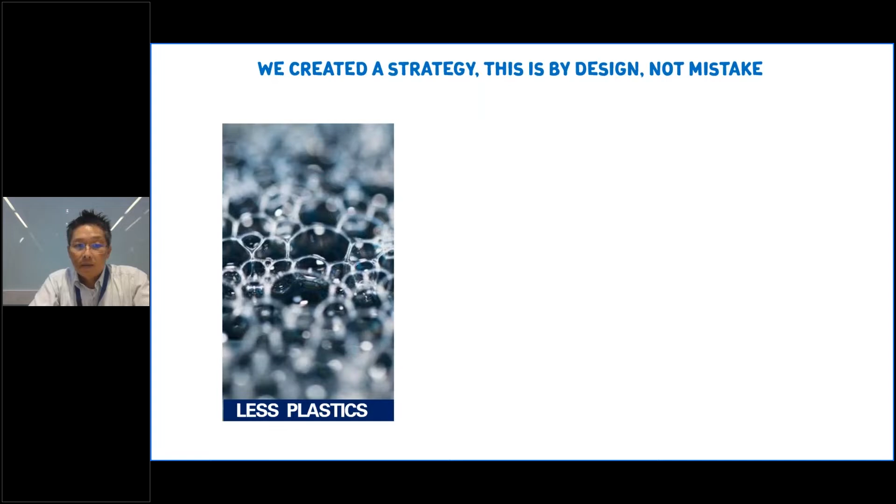And therefore, we create the strategies by design. So we're looking into how we use less plastic, how we make plastic better, we call it better plastic, and wherever we can reduce plastic in use. So that is really simple, how we tackle plastic as a problem, right?

So there's an example where we already use recycled plastics. In the US, and also in Southeast Asia, we have a lot of bottles using recycled plastic. We are the lead in using that. And at the same time, we also need to turn packaging which is non-recyclable into recyclable. So across categories like personal care, beauty, home care, food and refreshment, in sachets we are looking into mono material.

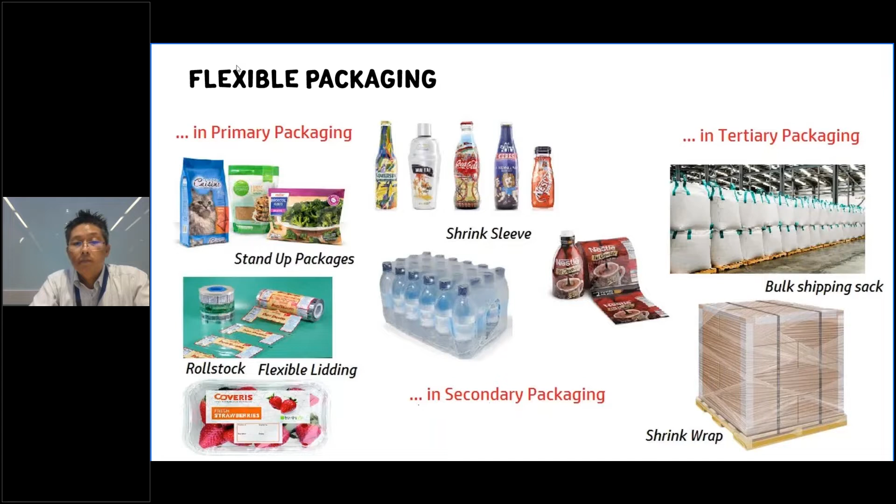Flexible packaging is the key challenge for us and for everyone here as well, right? Because it represents every type of packaging, from primary to the decoration of the pack to secondary and tertiary packs as well. Everything is flexible. Why? It's so good. It's so light. It's so cheap as well. But of course, at the same time, it brings a lot of benefits to us as well as challenges.

So I would like to take this as the starting point where we tackle the plastic problem, right? Flexible packaging is absolutely very lightweight compared to any other packaging format, right? Obviously, it protects the product as multi-layer, you see. So we enjoy that. It carries the right quality to the consumer, on shelf it's also brilliant with a lot of differentiation, and when you carry it home it's also light.

However, the bigger challenge for flexible packaging, after all that benefit, only comes after consumer use. I call it post-consumer, right? Where does it go? It goes to incineration, rivers, the ocean that we were just talking about at the start, and landfill, right? Why? Value. It has no value remaining. With those multi-layer packaging, there's no value. How do we turn that around to get it more recycled, and then bring the value back?

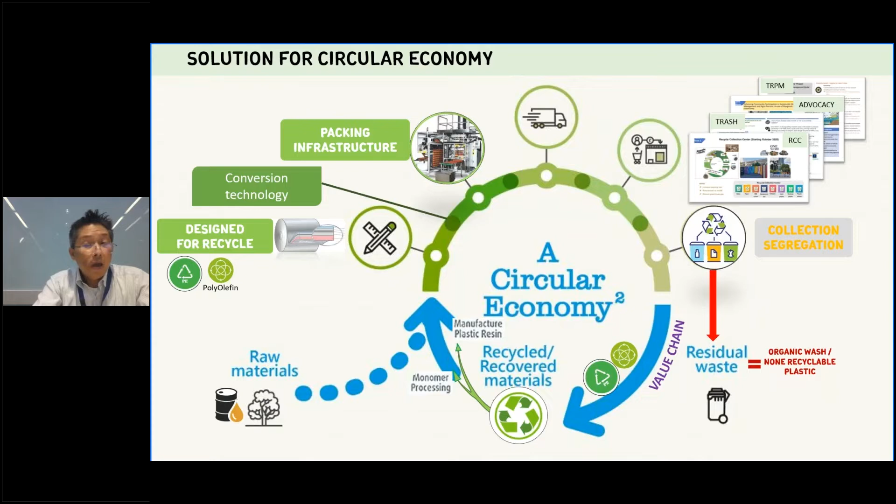So at Unilever, we also put in a lot of activity, along with collaboration, especially in Thailand, in several programs we call, as you see, TRASH, advocacy, and EPR. There are a lot of things we are doing in every market that we have. So we're not alone. We have to work together, guys. It's not easy. This is a tough job to be done, right? But I believe we can make good progress if we are all together.

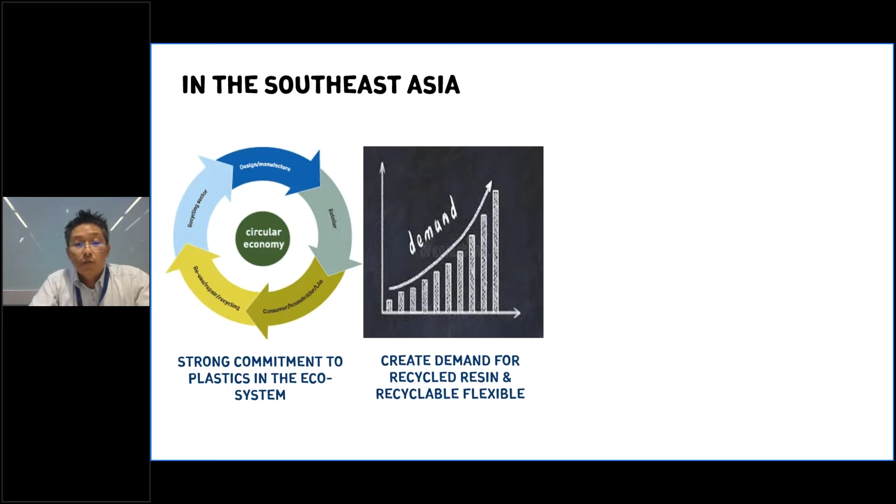We will add demand for using recycled resin. Then we can talk about recyclable plastic. If we make recyclable packaging and there is no demand for using it, what does it mean, right? So we are the ones using it as well, and of course also turning flexible packaging recyclable so we can create the demand, right? And at the same time, we also create a lot of

forums for collaboration. For example, here in Vietnam, the chairman sits in the forum and talks about our mission, our job to be done, what we are looking for. At the same time in Thailand, ITM does similarly with the Thai community for the Thai market.

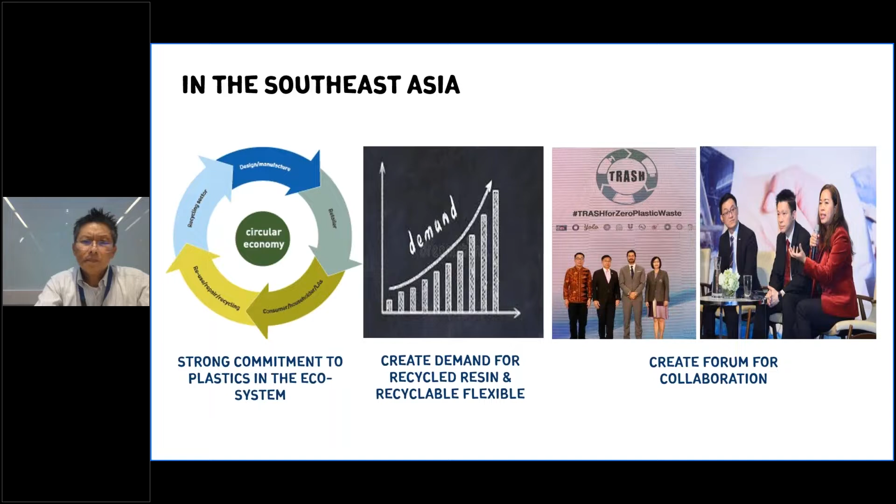This is an opportunity for all of us to level up our collaboration, boosting technologies developed for, first, design, second, converting using mono material, and third, technologies to handle this material, right? Mono material is very different from multi-layer flexible. PET has very high heat resistance. Mono materials like PP or PE are very low. So that's always different. Infrastructure needs to be upgraded anyhow, right?

And in the end, how we push together, work together to build segregation, and make recyclates better, right? Better value. If it's better value, then it's going to be recycled, right? And how we deal with legislation in order to unlock it together, with activities on collection and segregation.

Okay. Lastly, I would like to share with you a project where we turned the sachet, which is multi-layer packaging, into a mono material. This was launched in Hanoi, Vietnam, last November. That's actually the first ever that we brought something like this, talking about sustainability.

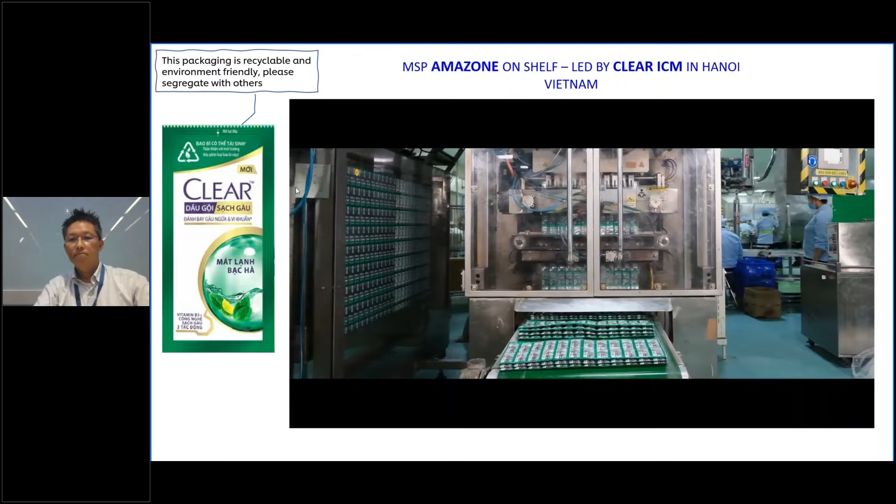All you need to do? Segregate your used sachets. It will be collected and recycled into usable packaging. Clear believe men and women deserve to have a clear, dandruff-free scalp without damaging the planet. What are you waiting for? Clear head and clear planet.

And that's all. I bring the context into here, as what you were doing. I'm looking forward to a wider, bigger collaboration among the industry and among those leading on technology. This is how we can do this together. We believe we can solve the problem together. Thank you.

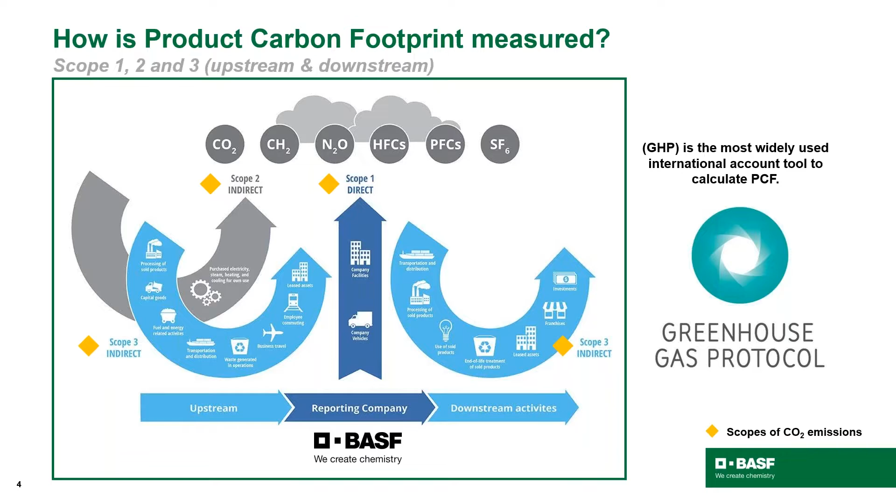So in this case, as a coating and adhesive supplier, we make use of this carbon footprint measurement to tell our customer what will be the carbon dioxide emission in the process, where we cover cradle to gate. So where we bought this material and put it into our process, after calculating the greenhouse gas emission, we have a value, CO2e, the carbon dioxide emission in this whole process, from the raw material until it is shipped out from the BASF gate.

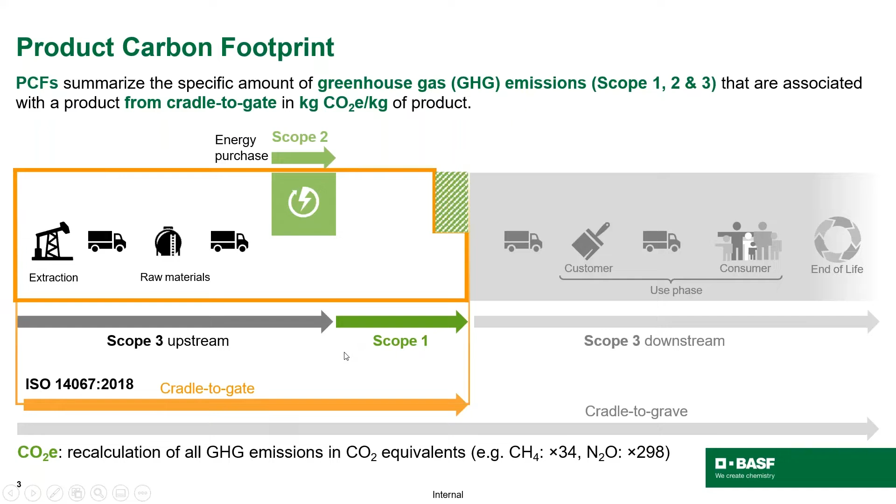So we have 45,000 products already with product carbon footprint data, comprising 20,000 raw materials under scope 3, 10 terawatt hours per year of energy that we purchase, which is under scope 2, and scope 1, where we include the 700 production plants in the calculation. So we have a tool that does the calculation to come out with a carbon dioxide emission per kg of dispersion that the customer uses. So this is how we do the calculation within BASF.

So how does it look? When the customer wants to know the emission, this is one example. You have a product which shows 1.3 kg of carbon dioxide emission per kg. So if you use 1 metric ton, you just multiply by 1,000, and it becomes the kg of carbon dioxide emitted for the volume you use, either annually, monthly or weekly. So it is very easy for the converter to calculate the carbon footprint of your product if you are using a BASF product.

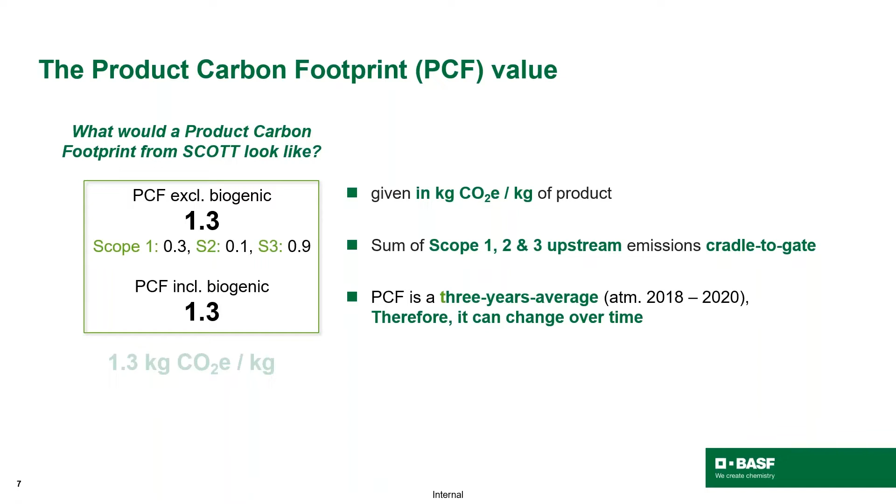If you take 2020 to 2023, this number will be different because it includes the biogenic, meaning the bio-based raw material that we use. Without the usage of bio-based material, there is a baseline number. After using the bio-base, either partially or completely, this number will change because it takes 3 years of average. If you see these two figures the same, it's because the average of 2018 to 2020 is still low, meaning the usage of bio-based material in the process was still considerably low. So in the long run, this figure, the PCF including the biogenic, will get lower and lower. This will be the value we show our customer, how much is the carbon footprint if you are using BASF product.

This is just an example to elaborate what is the benefit of using our material, which involves using the bio-based material. We call it the biomass balance concept. That means we use material from bio-based sources, either from bio-waste, biogas, or biomethane. This kind of raw material that we put into our process allows us to calculate how much percent of bio-based material is used to produce a product.

So this is a comparison, for example, the acrylic dispersion, just as an example. This product is Acronal 7660. Before, it had 2.5 carbon dioxide emission per kg of material. Using the process, we reduce the energy, we use cleaner energy. The most we can achieve is 1, but this eco version is 1.3, for example, as carbon dioxide emission per kg. But if we use the bio-based material in the biomass balance concept process, then it will reduce to 0.4 CO2 emission per kg of product. This shows a 70% reduction. This comparison is between the fossil-based material versus the bio-based material.

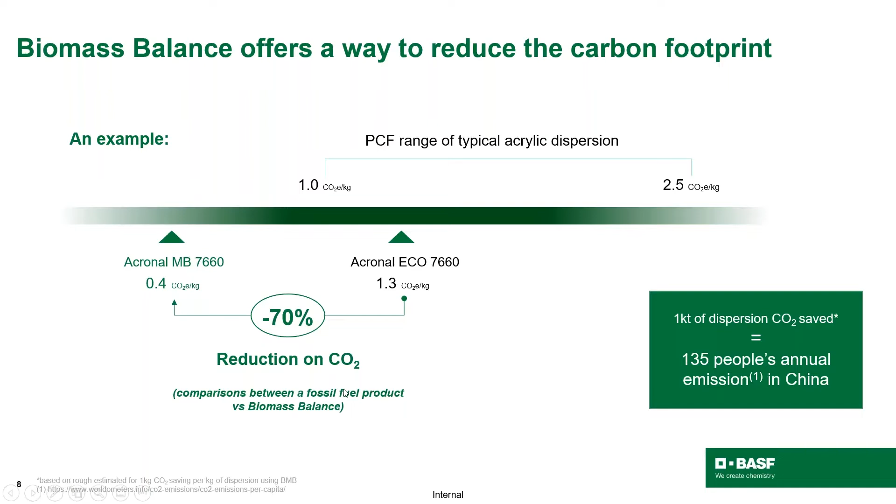So this is the value and the benefit of using bio-based material, and we can help our customer understand the carbon footprint reduction comparing fossil fuel and biomass material.

What is the benefit? People may ask, if I use this material, what will be the benefit? Sometimes you need to know if there is a government initiative - some countries need the consumer or converter to show the carbon footprint of your product, so you need to comply with governmental regulation. Some organizations have sustainability targets - if a brand owner wants to set product carbon footprint reduction goals for years, this could be a very helpful tool to help our customer, converter, or brand owner understand if they buy product A versus product B, what the carbon footprint reduction will be. And there's regulatory and legal pressure.

Sometimes environmental bodies or non-government NGO bodies want to help society with regulation, to put pressure on the converter or the industry in order to produce lower carbon footprint material. So this is the value added, and this is the benefit where BASF can play a role. There's also investor demand from big organizations - you need to have ESG reporting in the investor, annual, or financial report. So this is also one area where product carbon footprint measurement or data can be helpful.

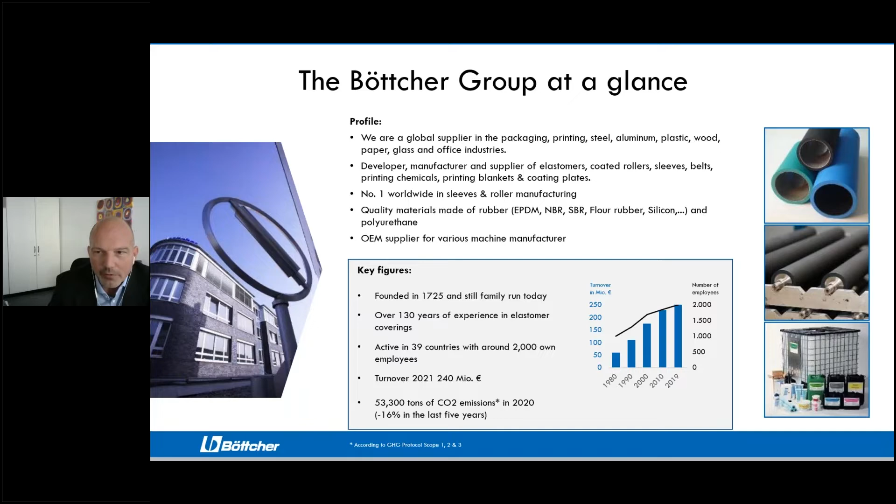We also consider the reduction of CO2 emission in our production. This will go step by step on all the different locations we have. So Böttcher is a group.

We have already 27 production plants in 39 countries, which enable us to be close to the customer for serving this. Our headquarters is located in Cologne, Germany, where I am currently also sitting in my office.

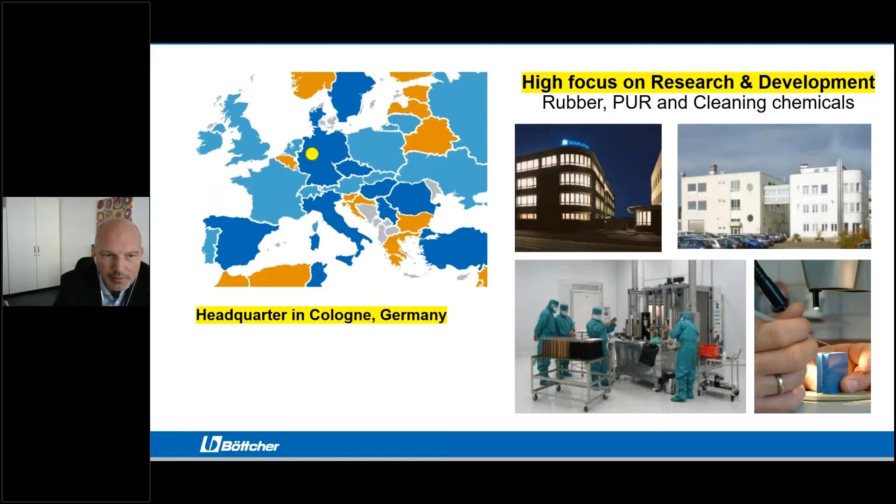Here we have our R&D, where we develop the compounds for the covering of the rollers and the sleeves, which we produce, for example, for company Comexi. We have our own rubber mixing plant, which is also essential to assure the high quality.

From this mixing plant, we deliver the coverings for the rollers and the sleeves to our production plants in the world, which means if you get a roller from Comexi, it will be the same compound as if you get a roller produced in Thailand or in America.

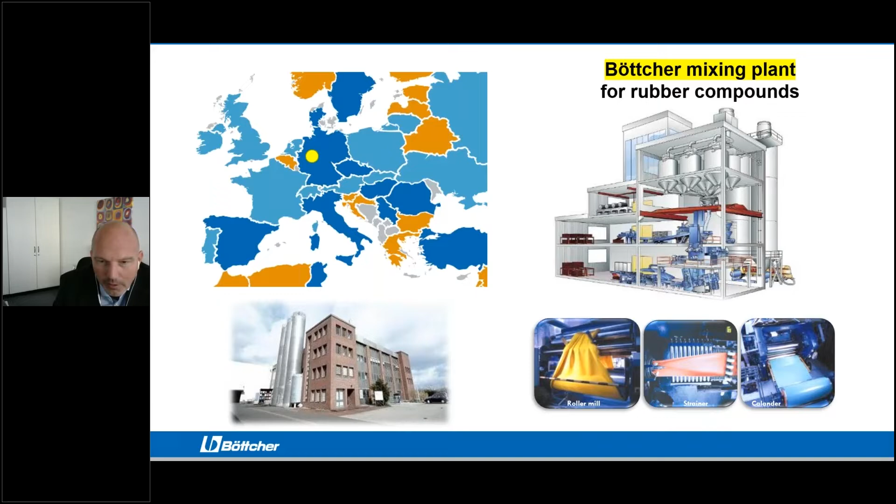Our relation to Comexi is mainly via our subsidiary Böttcher Ibérica, located in Madrid. So there is a close cooperation. We are proud to be able to deliver products not only for lamination, but also for the Comexi offset CI and also for the slittering device.

So that was a brief introduction about this, and now I would like to come to a bit more in practice. When I got the item for this presentation, I considered: what can be the contribution of an elastomeric sleeve or roller covering to make a sustainable production process?

So what is the target is clear, I guess. We have to consider the environment. We have to find ways to reduce the carbon emission. So I think the target is clear, and also thanks to the information from the previous speakers from BASF and Unilever, it's totally clear that something has to be done.

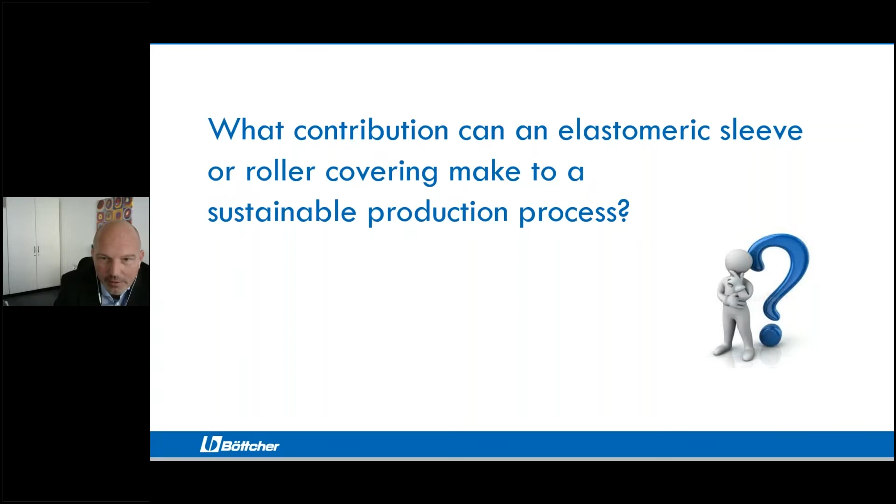But what can we do from our production process? What are the challenges if you run devices for flexo printing, rotogravure, or also for lamination or coating?

What we see is a change in the material side. So we see more and more thinner materials to reduce plastic amount, but these kind of materials should have the same barrier properties. We see also a new combination of material with a higher content of recycled materials.

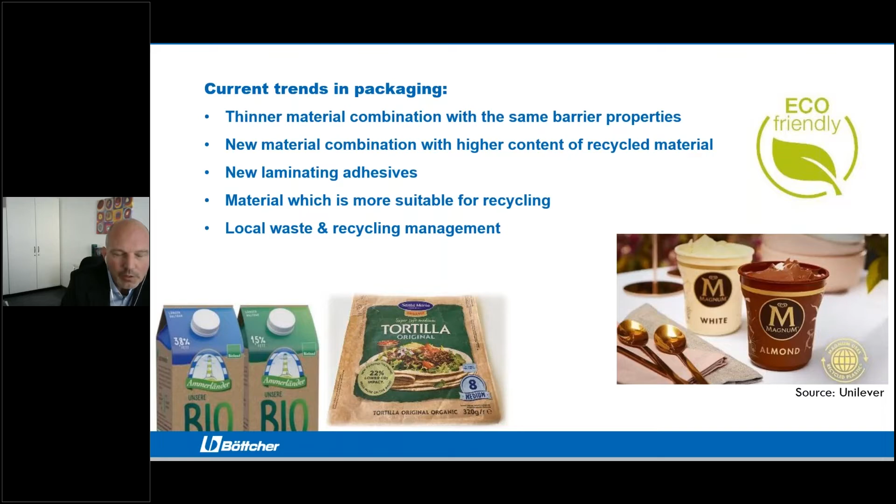We see also new lamination adhesives to make this processable. We see materials which are more sustainable or suitable for recycling. And also an important part is more local waste recycling management. So these are the trends which we notice from the different markets around the world.

So what are the challenges for our packaging industry, and how can I adapt my process to the new requirements, which means how can I produce this? And of course importantly, who can support me on this, which means how can the supplier support me to make it possible to produce new materials in my production.

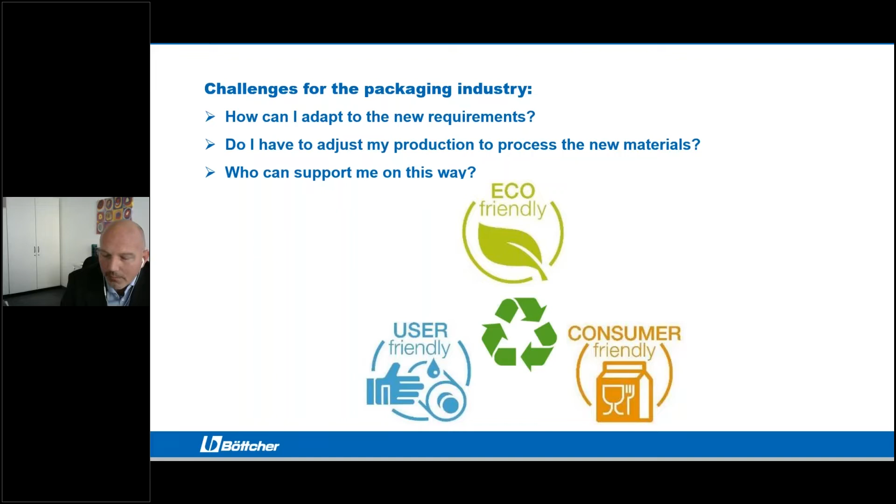From our side, elastomer technology can help to adjust the production process to the new materials. This will be our part. We should have high performance and long service life of the coverings. This means also reduction of waste in the production. And also, last but not least, we should take care of the logistics. This means we should have a short distance supply to you.

When it comes to lamination and coating in your production, then you have different options from Comexi, specialized for your individual requirements. And now I would like to take a short look into what we can do in case of coverings.

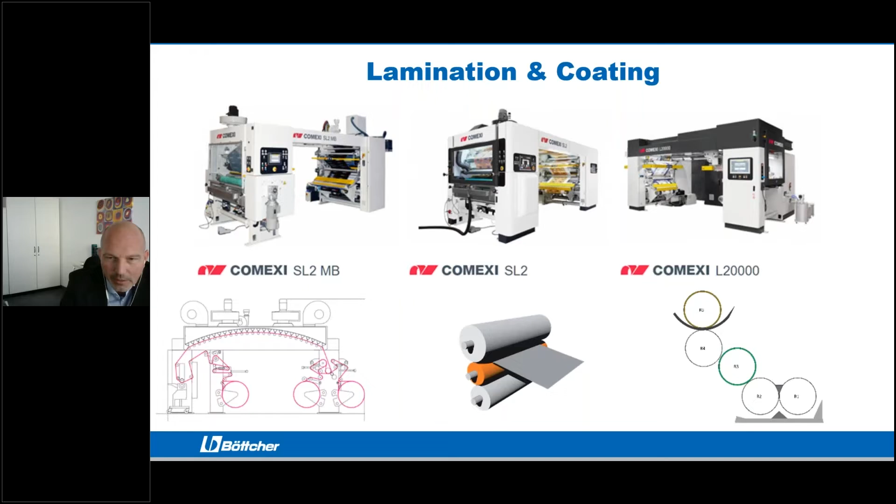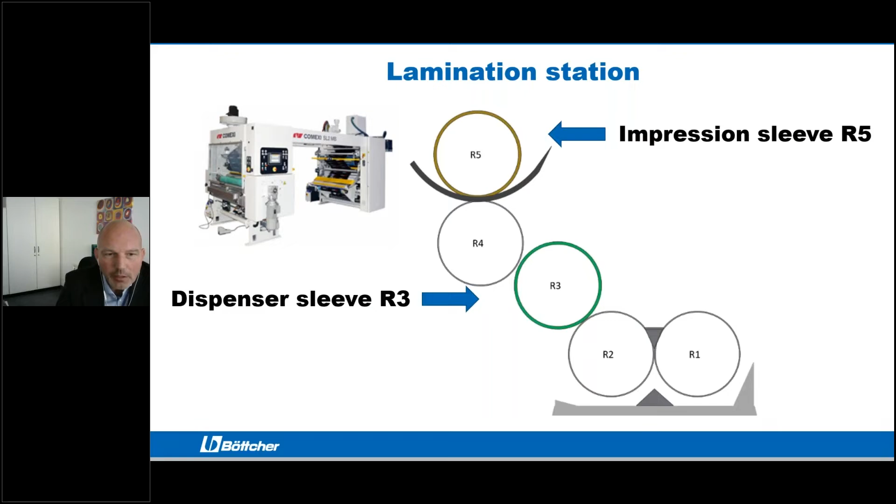If we look at a classical lamination station, we have two types of elastomer rollers or sleeves. One is the impression roller, and the other one is a dispenser sleeve in this production process. The covering of rollers and sleeves normally shows up with different requirements.

This can be, of course, optimized media transfer. We need some good mechanical and dynamical properties. Abrasion resistance and also chemical resistance is also very important to have a long lifetime of the products and of the sleeves or rollers you are using.

The basic structure of an elastomer material - for example, some of you may know we call it an EPDM with 60 Shore, but EPDM is not only one basic polymer. Normally the coverings are made out of a recipe, and this recipe contains up to 15 to 20 different ingredients.

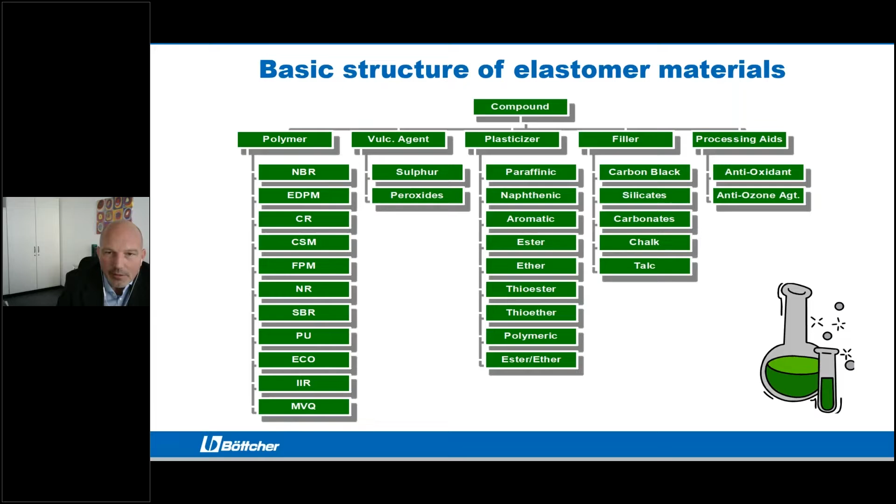This can be the polymer like EPDM or NBR, but there are also vulcanization agents like sulfur or peroxide. We need some plasticizers, we need some fillers, and also anti-aging processing materials inside. So this means the elastomer covering is made out of 15 to 20 different individual ingredients.

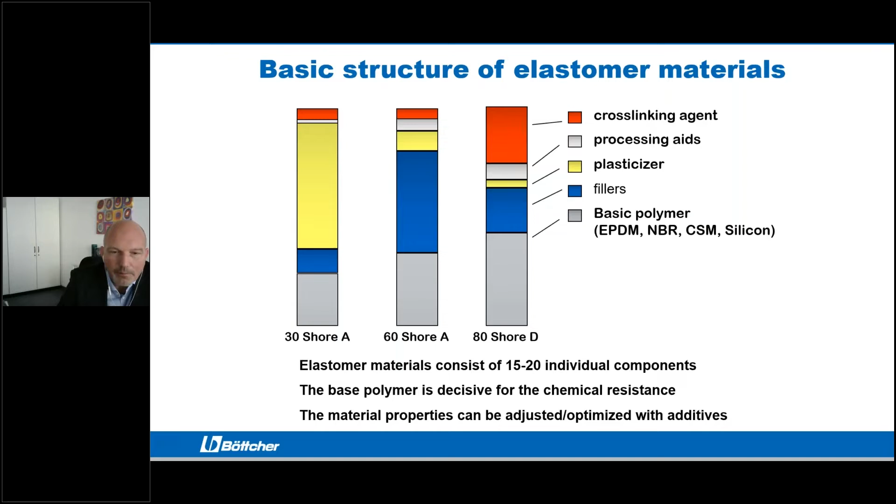The basic polymer, like EPDM or NBR, is mainly responsible for the chemical resistance. This means if we have swelling or shrinkage, or if it's stable, and we can also use additives to adjust the different properties. Here is a sample of different hardness, which can be, for example, 30 Shore A, quite soft, then 60 Shore A or 80 Shore D, which is a very hard material. Depending on the recipe, we have different properties of the material.

When it comes to chemical resistivity, we simply split into polar rubber and non-polar rubber, and also polar or non-polar liquids. If you have a polar rubber like NBR and a polar liquid like an ester, such as ethyl acetate, and put them together, you will get swelling. If you combine EPDM with a polar liquid like ethyl acetate, there is no swelling.

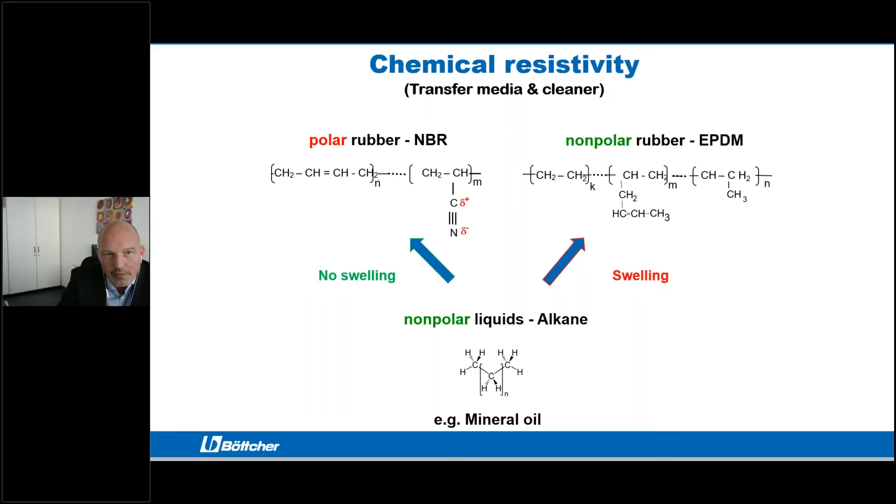Same in the opposite case: if you have a mineral oil-based product, used for example as an ink for offset, and you have a polar rubber, then there is no swelling. If you combine mineral oil with an EPDM, then you will see swelling. Swelling means an increase of volume and a decrease of hardness. Shrinkage means a decrease of volume and an increase of hardness.

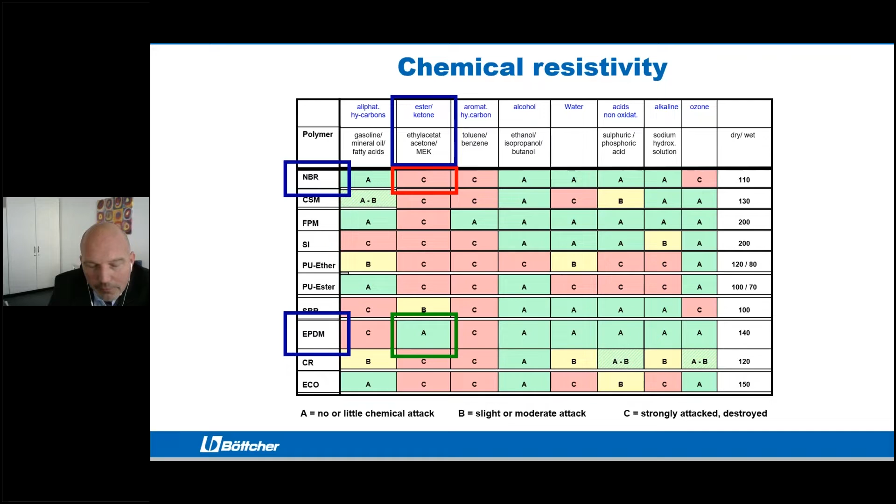So, all over this, we checked in our laboratory what would be, from the chemical side, the best material to have a long life of your roller and/or sleeve covering. We also do further tests in our laboratory. For example, in case of mechanical properties, we test the abrasion resistance, the tensile strength, the tear growth resistance, and also other things like compression set. This is all to have as long a lifetime and service time as possible.

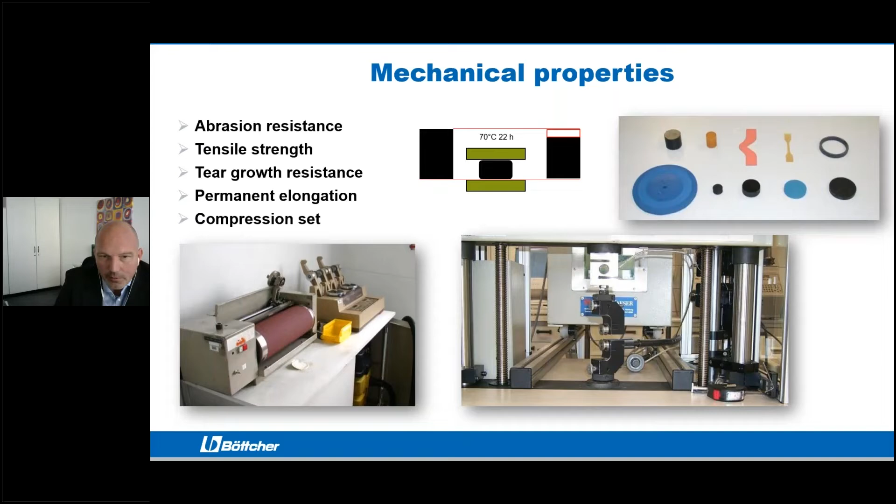This is also important to have a sustainable and reliable production. We also have the possibility to do some dynamic tests, which means not only in theory, but we can also do real life tests with our elastomer compounds. And what is the reason behind this? Because when we do these kinds of tests, we can also check the performance.

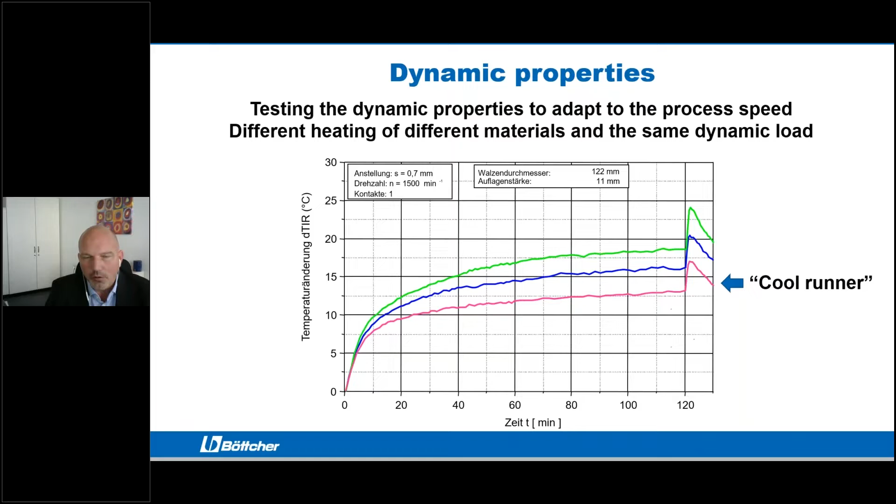Under production process requirements, this means, for example, how is the performance when you increase the pressure? Will the covering stay cool or will it heat up? So this is also one part which is important to have a reliable and optimized production process in your lamination, coating, or other application.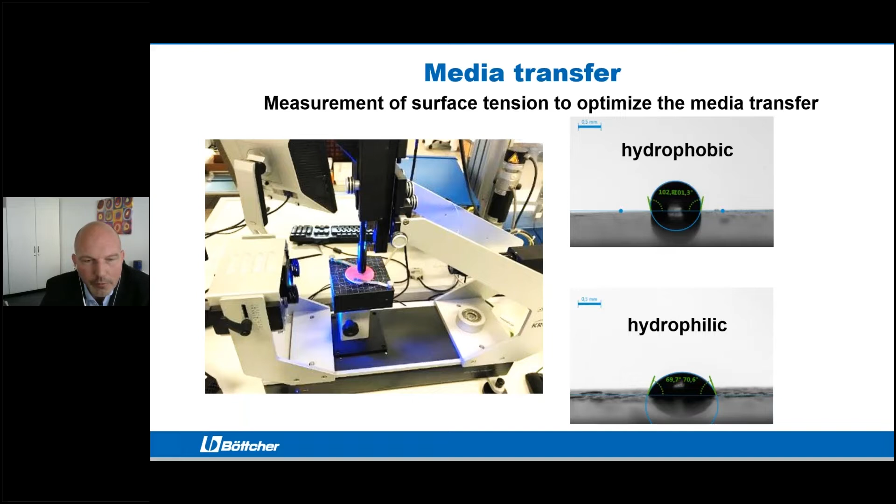We can also do measurements of the surface tension of our materials. There we have, for example, hydrophobic or hydrophilic behavior of the rubber and of the media which we put in contact. This is also important to optimize, for example, the transfer of the media in the application.

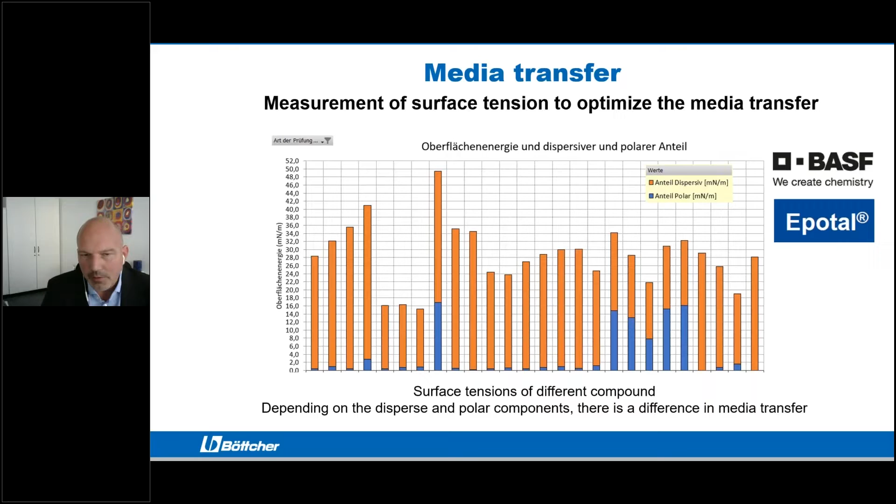Here's just a short picture: we can measure different surface tensions and find, for example, for the products from BASF, the optimized compound to make it possible to use in the process—for example, in the case of the dispenser position in a lamination station.

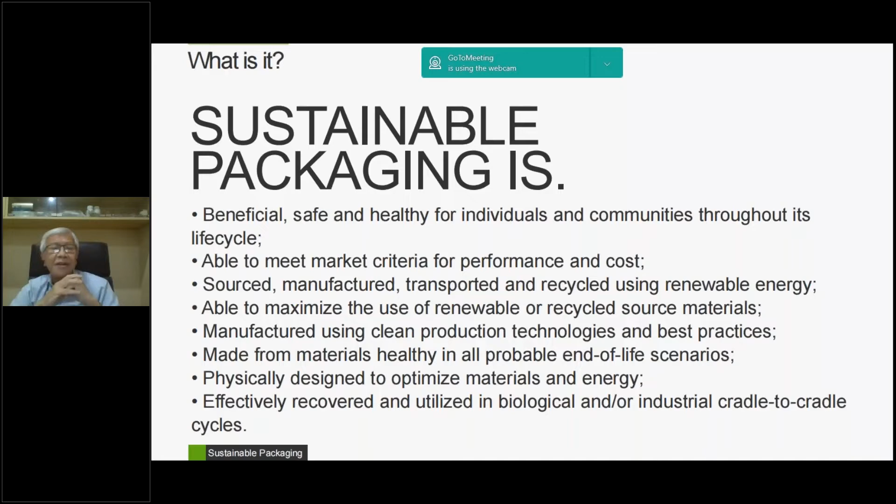That is so important. If we do recycling, we also have to be concerned about the impact, the healthiness of that product later on. The probable end-of-life scenarios are something we have to emphasize. It should be physically designed to optimize material and energy, as some of the previous speakers already started to talk about, and effectively recovered and utilized in biological and industrial cradle-to-cradle cycles. So a lot of agendas come with this definition. The first agenda again is regarding healthiness. Today we are more concerned about our health, and in packaging a lot of regulations are talking about that. So I started with our daily life today.

Yeah, you know, BPA, bisphenol A, is one concern in our packaging content today. Bisphenol A could be part of the substance in the coating, not really in the plastic; actually it's the coating in, for example, tin can packaging. Sometimes it is coated by bisphenol A, and some other material also, so we really have to be concerned about this matter.

And then regarding the volatile organic compounds, we have to understand that, as KK mentioned before, the carbon footprint, the carbon emission, and so on. So that is all we have to be concerned about for healthiness first. Secondly, if we are talking about recycling, the whole infrastructure, the whole ecosystem that we have to make definitely is a lot of challenge.

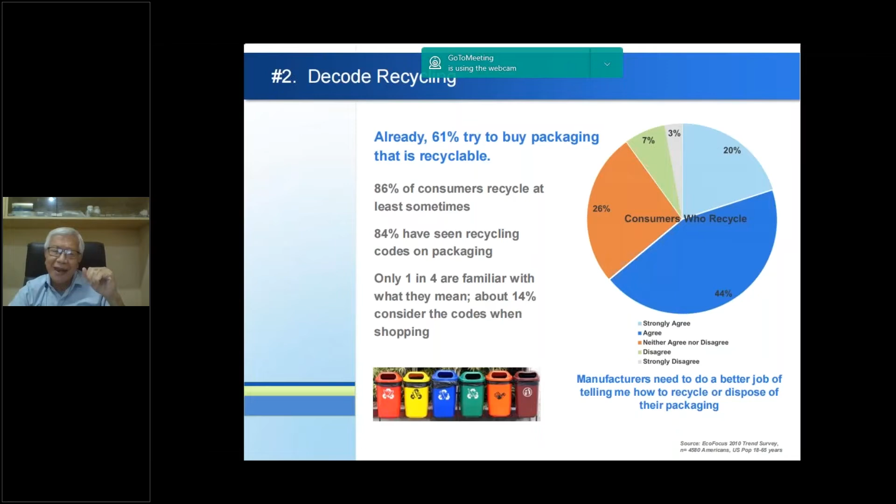And then regarding bioplastic and so on, in my experience we are really in a very prelude condition today. Actually, I would say there's a lot of greenwashing, a lot of so-called solutions, the non-plastic solution, for example, or the non-fossil based plastic solution, that sometimes are not really giving the solution. It's just a dream, it's not real. It makes another problem later on.

So of course, a material like polylactic acid made from cornstarch, for example, or any kind of carbohydrate material, could be compostable. Yes, according to ASTM D6400 and EN 13432, for example, this is compostable. But what is the condition in order to be compostable? This is another challenge, actually. So it's not in the mature stage yet.

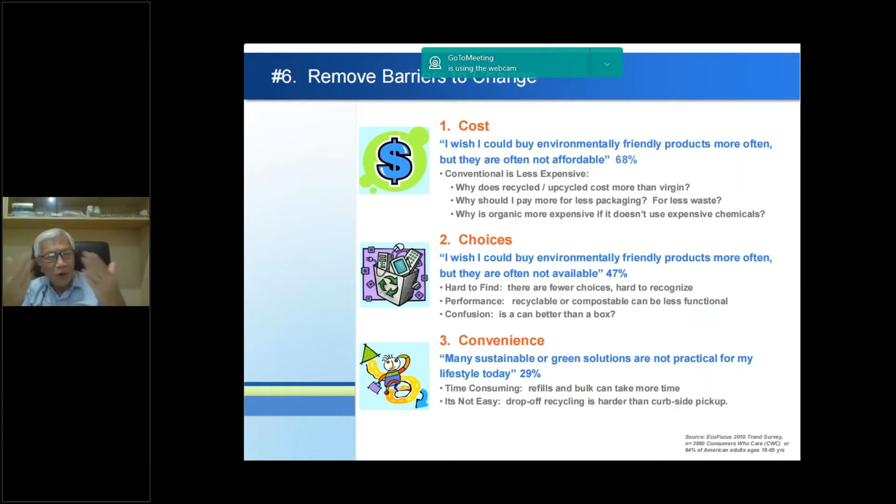And with cost, we also have to separate tangible cost and intangible cost. You see, the intangible cost is our future, which we don't put into a number today. So there are a lot of choices we have to find to make it the real solution, and then make it more convenient, not more complicated. So that is the whole agenda I'm talking about, and definitely packaging innovation today will drive a new opportunity.

I see in the future a lot of opportunity for this kind of solution. Definitely, it starts from the beginning, from the material intake, up to the end market. This whole value chain is the opportunity to explore in order to make more money in business. Definitely.

So sustainable design, if I start to summarize, is to approach creative production with the intention to reduce the environmental and social impact. This is very important in order to make effective decisions about what we are going to do. Again, back to what was already started by KK before from BASF with the carbon footprint, I think this is a good tool as well. Of course, talking about the ISO that I mentioned before, ISO 14040, 14041, and 14042.

But the tool, the life cycle assessment, the LCA, is a very useful instrument to assess the environmental impact of the product and the packaging. It starts, let's say, from the fossil up to the end market. How about post-consumer waste recycling, for example? That, but also energy consumption and water consumption. All in all, it is about carbon emission.

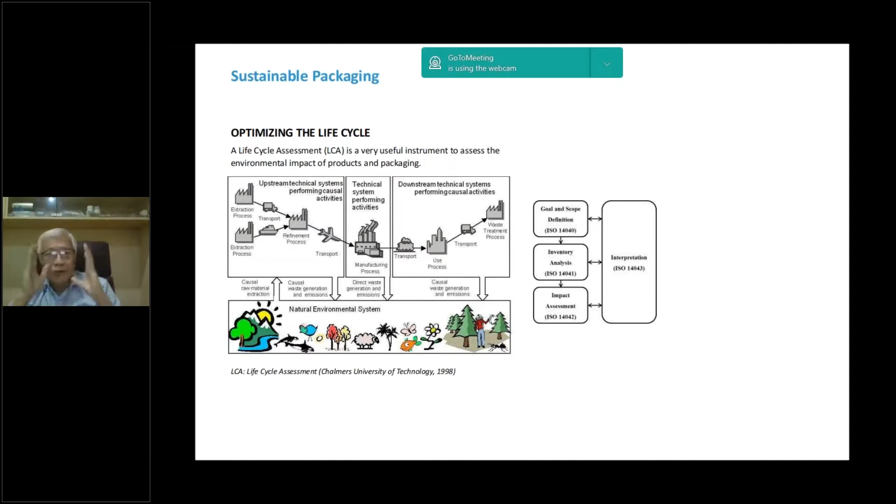So eco design starts with the top management decision. We are not good enough with packaging with all the basic functions that we have today. We have to minimize the environmental impact; the add-on to the core requirement is a packaging design that makes the circular economy happen. That is so important today.

So for the whole holistic eco design requirement today, you may see here a lot of questions that we have to bring up in making the right eco design. And this is definitely never finished up to now. So we really have to do more development. We have to make more improvement in that case.

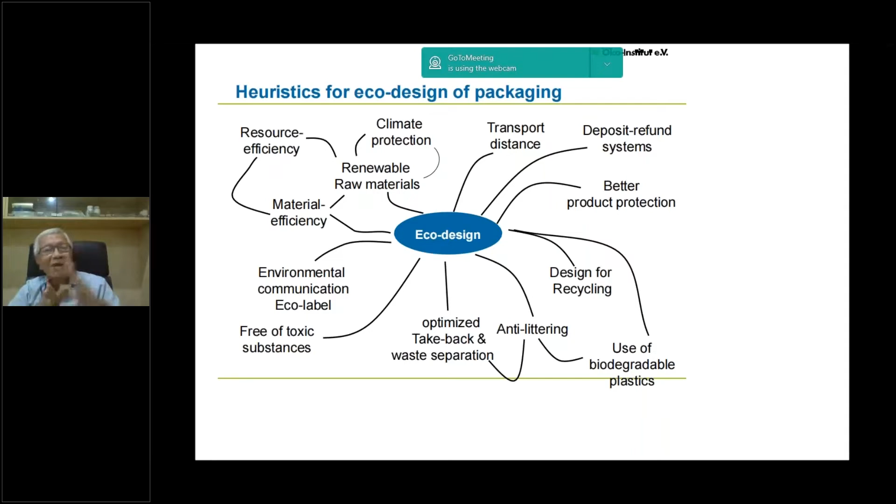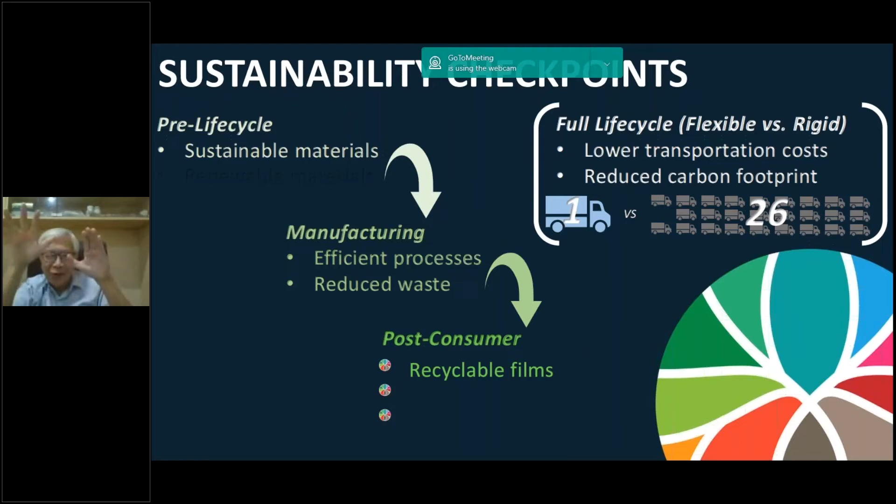So the sustainable checkpoint starts with sustainable material, the pre-life cycle, and then manufacturing, how to make a more efficient process, how to reduce the waste in the manufacturing process, and post-consumer, so that recycling happens. Recyclability is really happening. The full life cycle is also in regards to the energy consumption we are talking about: reduce the carbon footprint in order to also reduce energy consumption.

Of course, for packaging, we need to improve the functionality of the packaging itself, especially for food, because the majority of packaging today is for food and beverage, and that means high barrier. But high barrier sometimes doesn't really need plastic. For example, today we also need aluminum foil, but not only that. Actually, barrier properties today can be improved with certain materials that in the end can be recycled as well, and not only recycled but also reusable, so many times that we can reuse them.

And with the whole solution we can really make the circular economy happen. So towards resource management: the circular economy is not only about waste management, but about resource management. We can really save our resources, and that also saves carbon emission. That is so important today. So not only the packaging material, but all the products, especially food waste. A lot of food waste happens today, and that makes a lot of carbon emission as well.

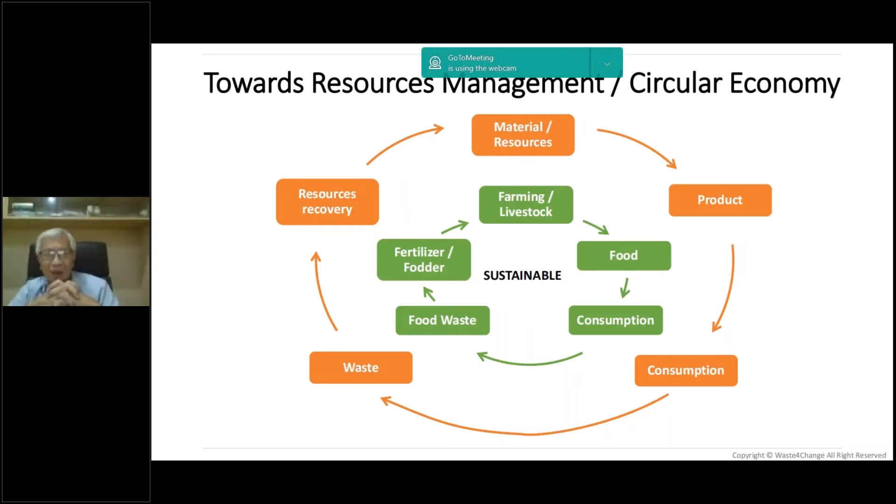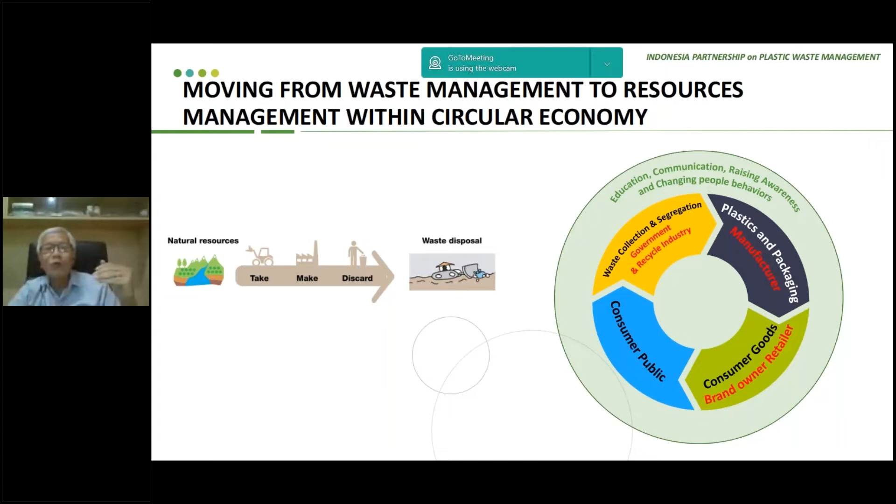So moving from waste management to resource management requires changing our mindset from take, make, dispose into a circular economy solution. That is so important, and for that we need to work together between all the stakeholders: the packaging manufacturers, the brand owners, like Unilever that we started with before, retailers, of course, and then the consumer, who generates the post-consumer waste, and then how to manage waste collection through government policy and the recycling industry.

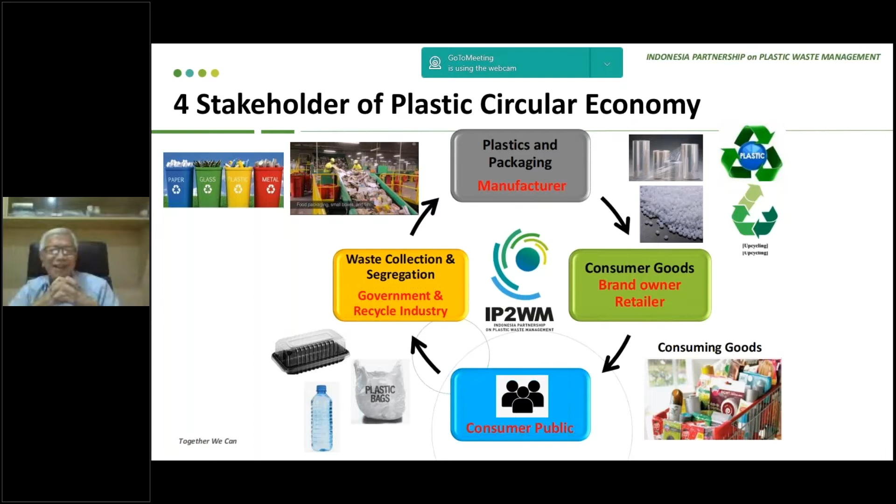I think this is my last slide. And again, I will emphasize for all efforts and initiatives that we need to collaborate to innovate and accelerate everything. Thank you very much.

Thank you so much, Pak Hengki. Well, in addition to what you mentioned, just a remark that shelf life increases with flexible packaging, but education is necessary in order to reduce waste in the whole world.

This is our task for everyone, citizens in the whole world, if we really want to commit in order to create a more circular economy and a more sustainable environment.

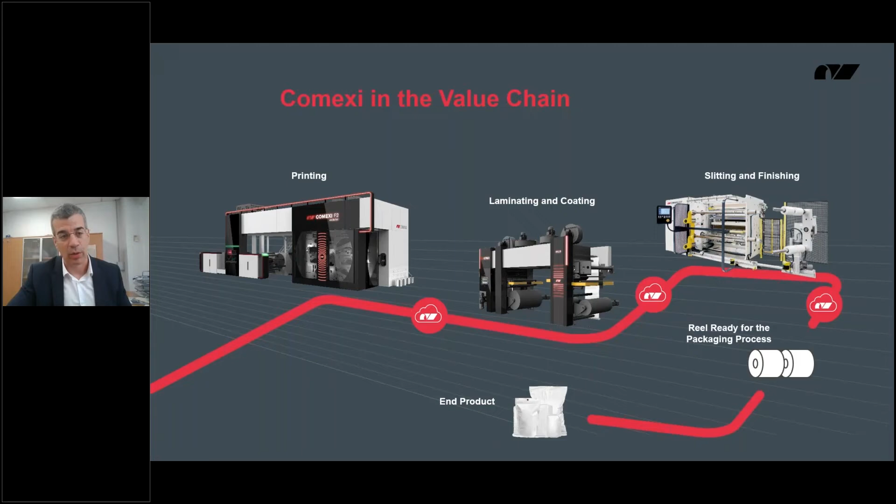So, new challenges, new solutions. I'm afraid I will not say anything completely different from what has been said, because yes, the global trend is sustainability. What about plastic? There's an anti-plastic feeling, which we can feel in any industry and in society, and it will be increasing, and plastic waste if nothing is done. This is of great concern.

I'm sure every one of the attendants in this webinar are professionals, and we know what plastic is, what the pros and cons are, and we have a sustained answer to this. But out there, perception is completely different. They're not professionals in this sector, and the media, NGOs, etc., are making a lot of pressure. So it is very difficult to battle that. So we have to act differently.

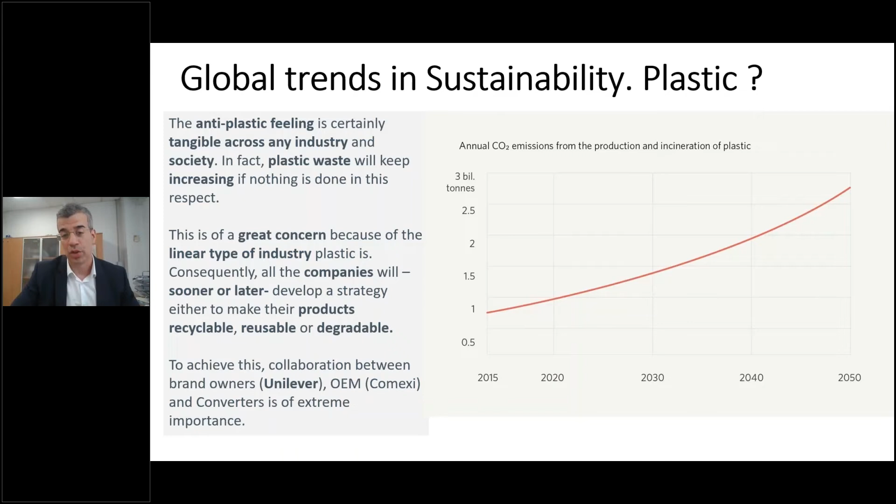It's of great concern because of the linear type of industry. So sooner or later we have to make it recyclable, reusable, or degradable. We are talking more of recyclable and reusable, as we think it will be the biggest trend. So obviously collaboration between the brand owners, the OEMs, and converters to achieve that is of extreme importance.

We all know, as I said, we are all professionals, and we know that in comparison to other packaging formats, flexible packaging offers very sustainable solutions and benefits. Resource, weight reduction, transportation, material reduction, waste, etc., and life extension of the products, which at the end, more or less, is quantified at 1/3 of the products that we produce are just wasted along the chain. So nothing new in this regard, but what could Comexi do?

So we try to reduce our environmental impact, focusing on VOC-free printing methods, reducing also the carbon footprint of our manufacturing processes. We're the only ones who made a life cycle analysis of our machines, from the very beginning, where the machine is not even a reality, until the machine is after 30 years of usage and finally the converter is renewing it. We develop new solutions with solventless, low energy solutions, and we also contribute to the recyclability of packages made with our machines.

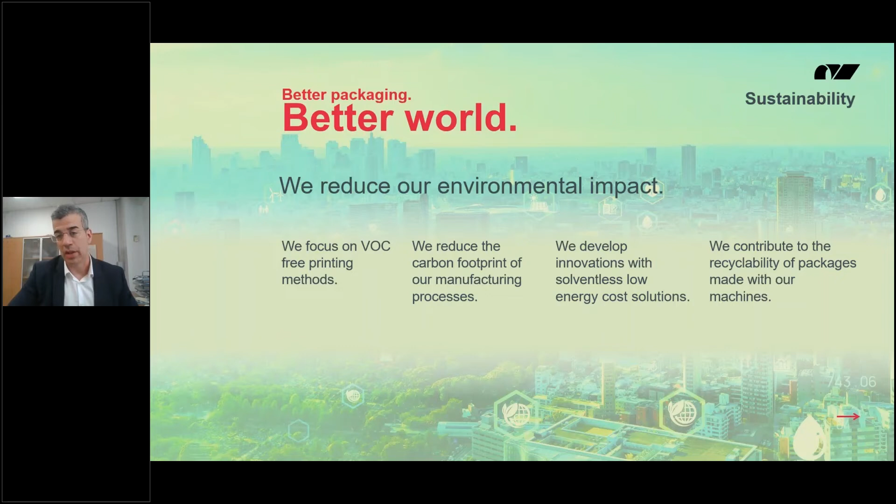So how can Comexi lamination machines help in the sustainability approach? Obviously, on one side, we have to reduce the film waste and VOC emission. Why? Because certainly if we produce less waste, that's a direct benefit to reduce plastic. How? First, we have to keep a very precise tension control, especially now that we are talking about these monomaterial sachets or pouches made of PE, MDO, and PE.

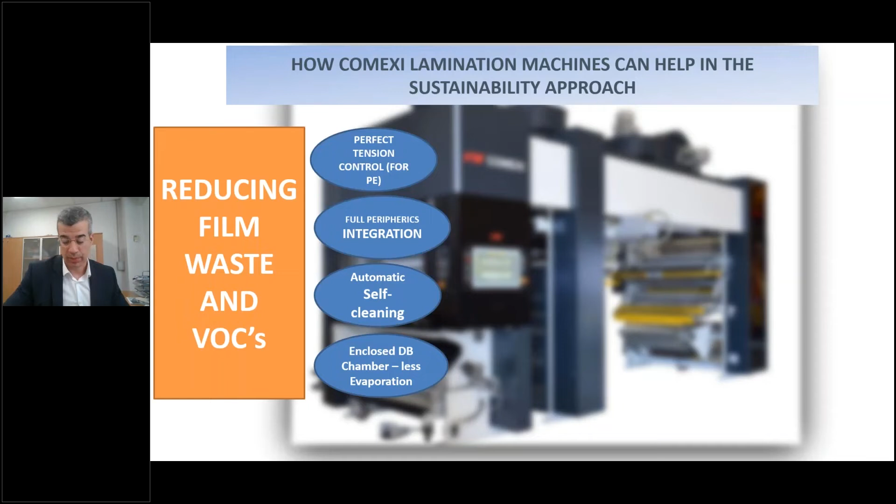All the full peripheral integrations allow us to minimize waste, because we are producing good packages from the first meter. Also trying to minimize the VOCs with all the automatic self-cleaning devices, as well as the enclosed doctor blade chamber that we will talk about and see the demo of, which causes less evaporation in all terms. That's one thing, but we also have to keep an eye on reducing energy.

Because energy is also costly, and lately, especially in Europe, we are suffering a lot at that point. So energy consumption traceability: we have to monitor every single second the energy we are consuming, per job, per day, whatever, to see if we can really fine-tune the energy I need for a certain job, to minimize or optimize it. Obviously we use the highest efficiency motors in the industry, and drying optimization as well. It's not about just blowing air, it's about how to make it efficient.

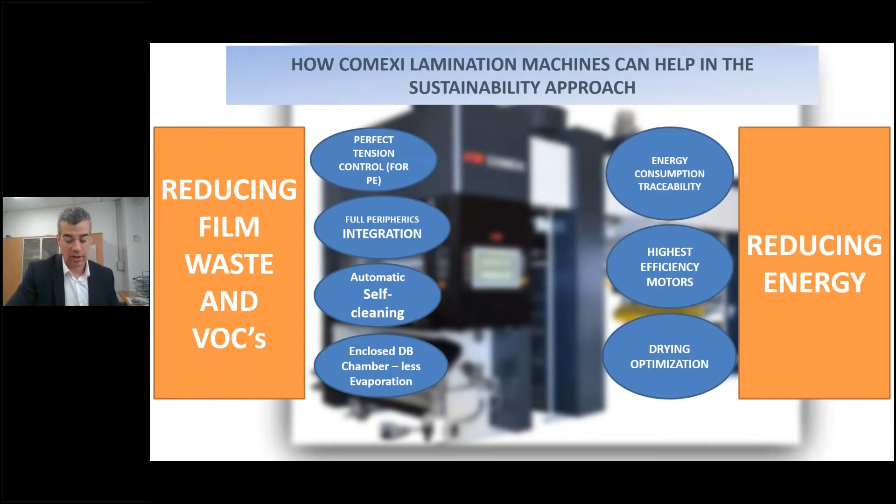When we're talking about technology, we're talking about different kinds of heat seals for certain types of structures, water-based coatings or lamination, solvent-free lamination, etc. So when it comes to choosing the right technology, we have all types of possibilities at our disposal. Let's say we have the water-based adhesive, in this case courtesy of BASF, and we would use the gravure trolley with pressurized doctor blade chamber, which provides a lot of added values, especially for water-based coatings and high grammage, answering the sustainability claim. Why? Let's see.

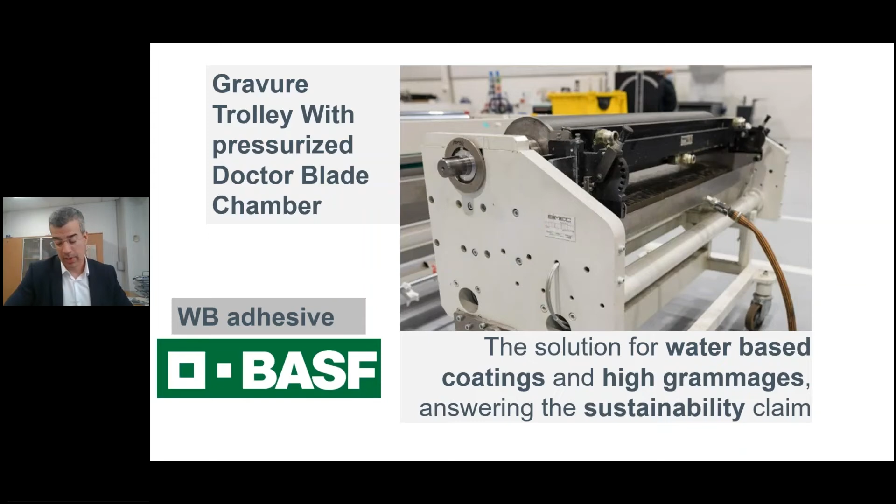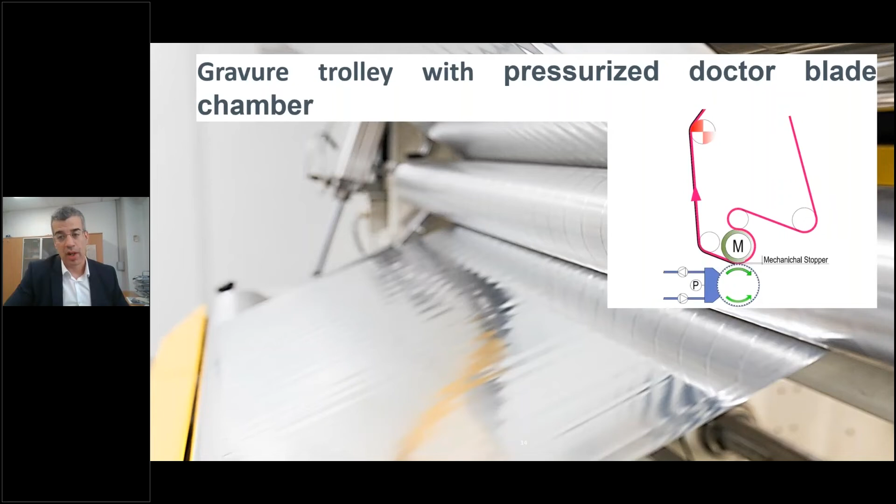This is the synoptic of the enclosed doctor blade chamber, which is pressurized, and we can work clockwise or in reverse. The quality of finishes you achieve with water-based applications is unbeatable. Reverse or front application: we are able to change the grammage depending on which direction we go. And the automatic self-cleaning provides a very quick changeover and less waste, because it's not like the standard gravure, where you have an open pan full of solvent that you then have to evaporate or clean, which in terms of waste and time is more painful.

Also, of course, we have to look at the drying efficiency. We talked about that. So we have a wide variety of different types of tunnels: 2 sections, or even 3 sections, meaning 6 meters or even 9 meters, and we can have different types of recirculation in every single zone. We can tailor-make it to customers' needs.

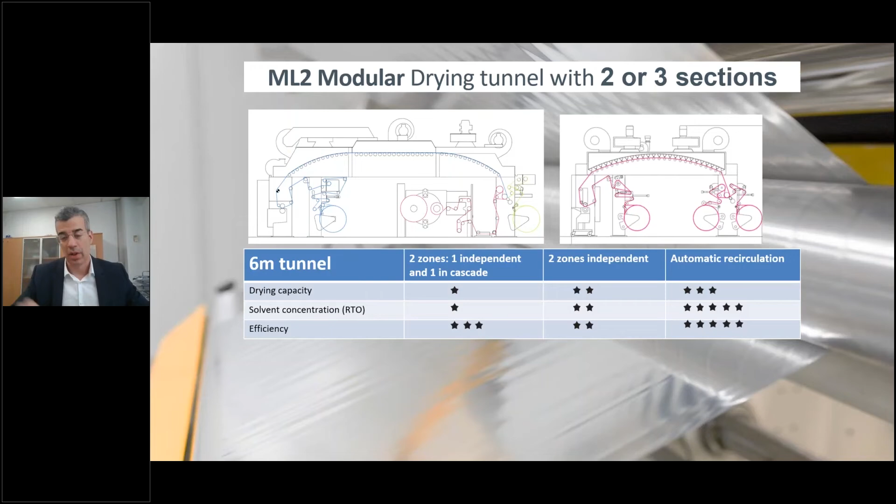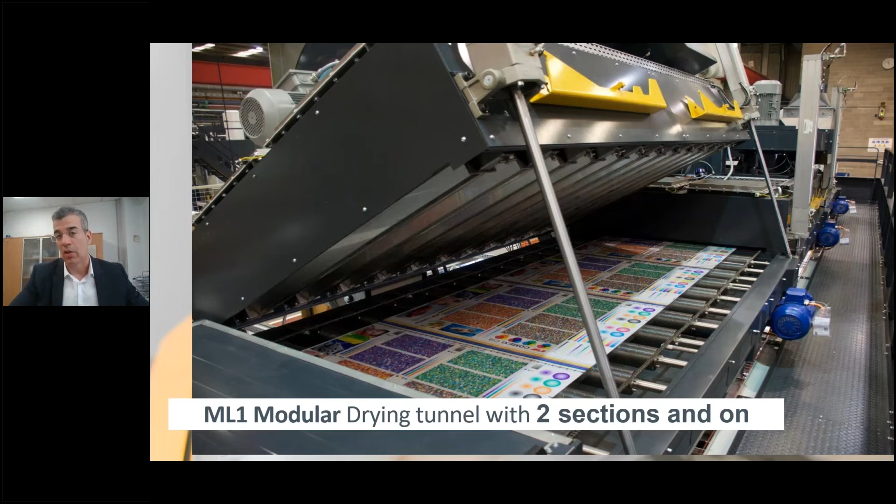Of course, we have this on the ML2 type, but we also have the ML1 type, which has a shell opening type. In this case, we can have 2, 3, 4, 5 units, depending on the coating weight we have to apply, the nature of the coating, and the speed the customer desires in every single case. So we really tailor-make the machines according to that need.

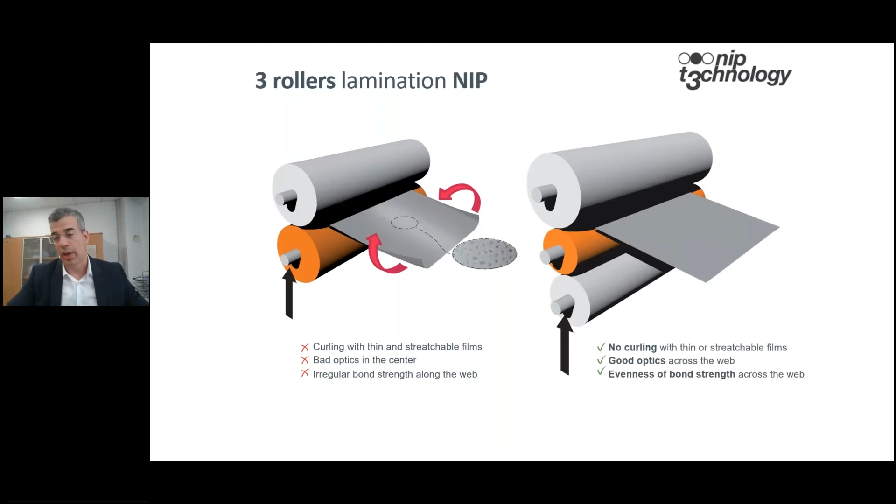As I said, all set points get kept in recipes and uploaded - that's what I meant about traceability. We have all our peripherals integrated, which minimizes waste. The reason is that every time we upload a job that has been previously done, all the parameters and settings of these devices will automatically upload into the machine with the same parameters that were previously stored. So we save a lot of human error, or mistakes that could occur if we were doing the job without that possibility.

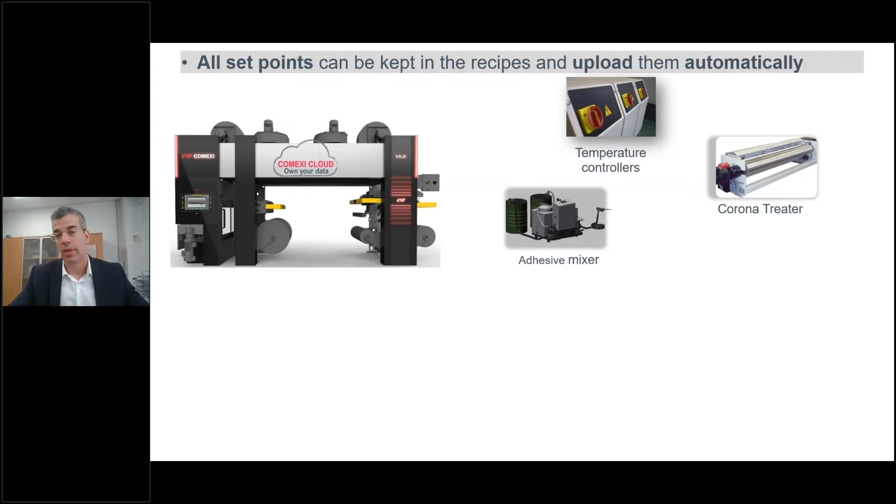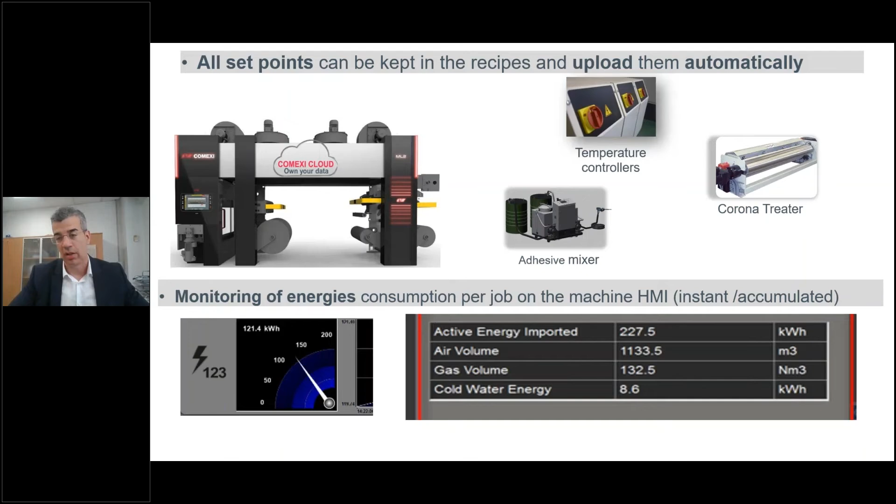As I said about monitoring energies, all our machines can be equipped with this - consumption per job, instant or accumulated, so I can know the kilowatt at each minute, or what has been the energy consumption for that specific job. It has full traceability of gas volume, air, cold water energy, or kilowatt-hour.

So this is a view of one of the different solutions that we're able to provide. But I think one image is better than 1,000 words - that's at least what we say here. So I think the best thing now is to move to see a live demo.

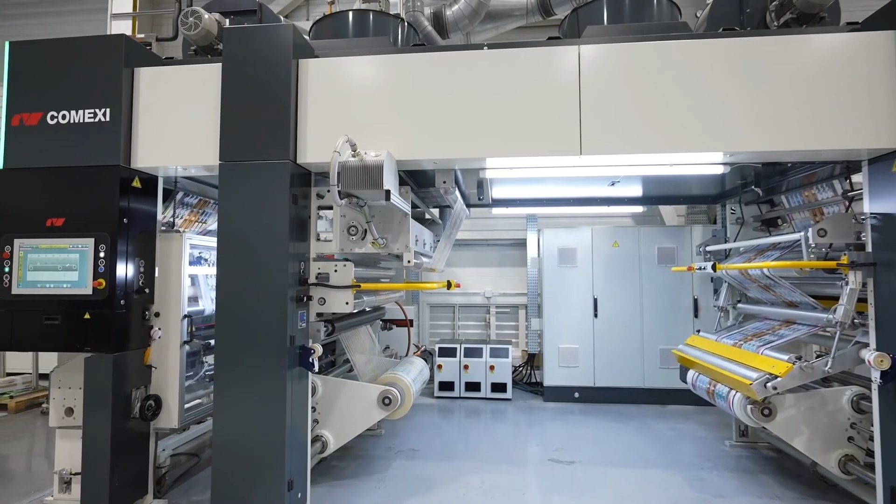Just to remember that the ML2 has a wide range of lamination and coating options, with lamination with solvent, solventless, water, wax, UV or EB coatings, mark-to-mark register, etc. Among them, today we will test the water-based adhesive coating to do the trials.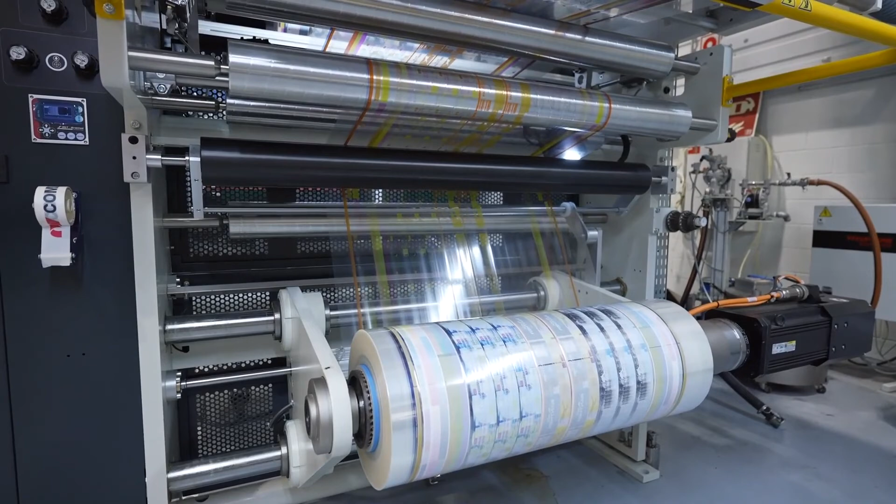So here on the first unwinder, we have the MDOP previously printed on one of our flexos. The winder is able to carry reels up to 1 meter diameter and 1,000 kgs. We see that we have the Corona treater on top from Vetaphone.

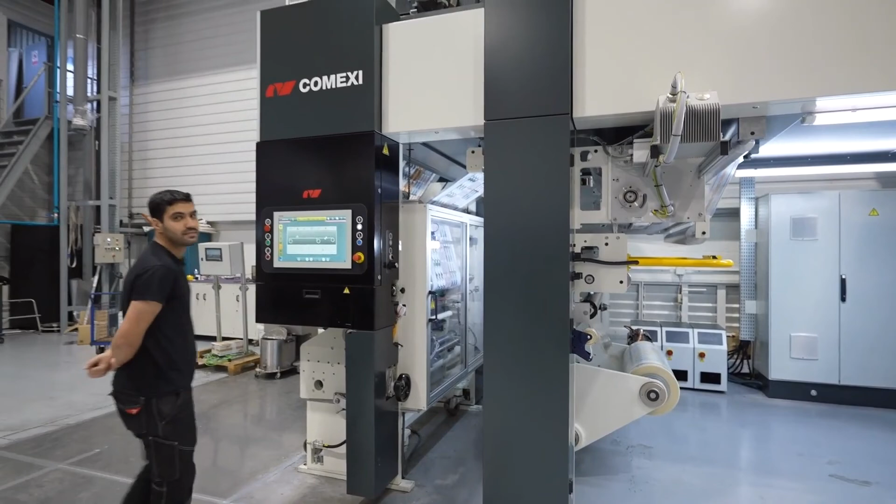And I think Khalid should show up. Yeah, there we go. Hello, Khalid. I think he's ready - just say hello to the audience, Khalid. There you go, thank you. So, Khalid, if you're ready, let's start. Let's commence the show.

Now Khalid will start adjusting the parameters, and now he's getting a closer view of the coating section. The coating technology used is the doctor blade chamber. Now Khalid is adjusting a bit the mechanical stopper for the coating roller just to make a kiss contact - very, very precise.

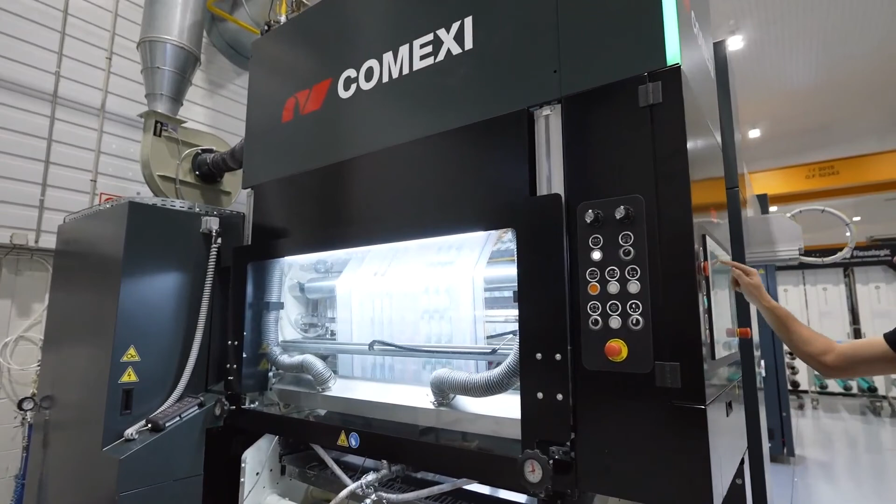Okay, now it's ready, and we are applying the coating with a perfect result onto the web. We are accelerating, and there you go - 100% coverage.

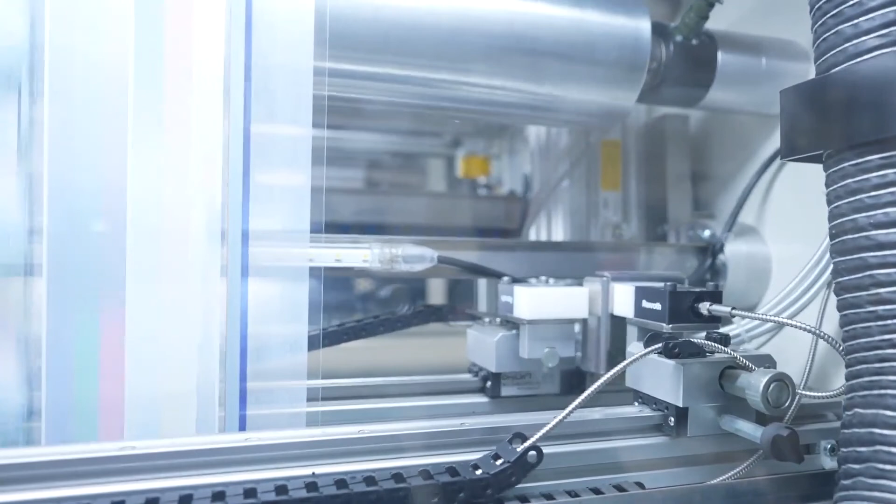Okay, we see all these tubes - that's the fume extraction, which is easy to replace. And here we have a very close view of the mechanical stopper that I mentioned previously. It's just to set a very gentle kiss contact between the pressure roller and the film.

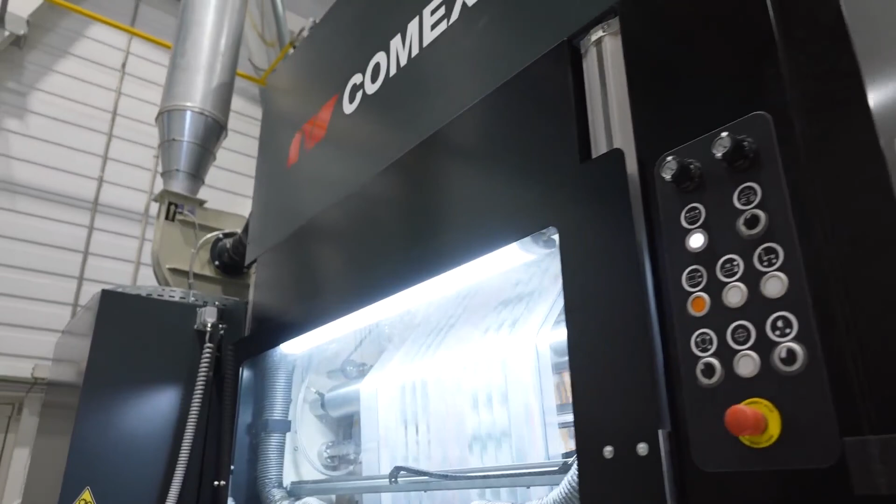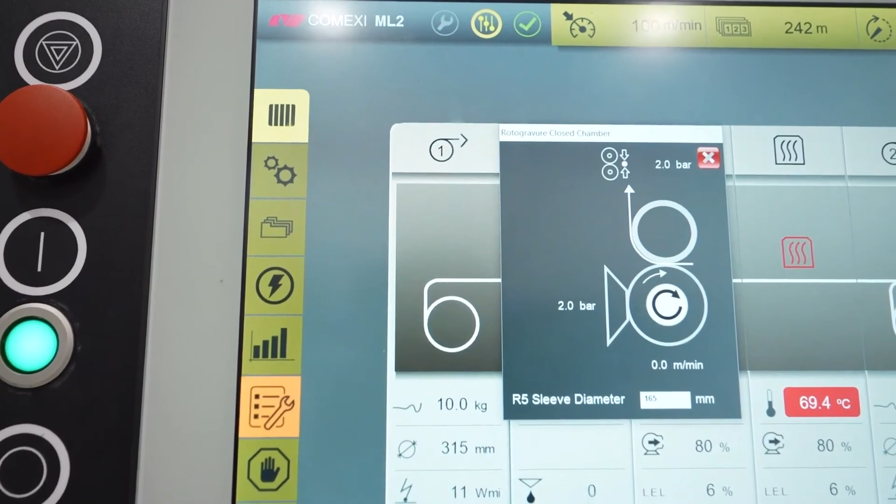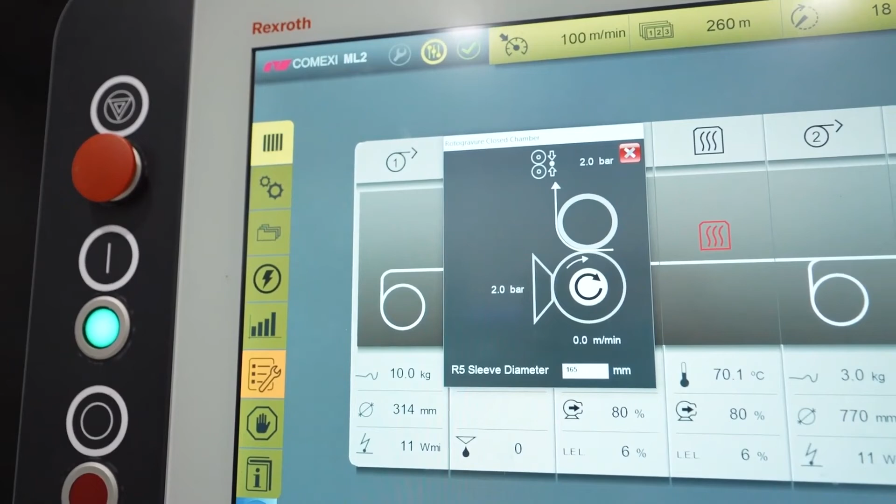Could we switch back to the screen for a second? Oh, there you go, yes, great. We can see a synoptic of the pressurized chamber and dosing roller, which is rotating clockwise, just the opposite direction of the film. We are running at 100 meters a minute. This coating system is equipped with an automatic cleaning system that will flush the cleaning solution once finished into the chamber.

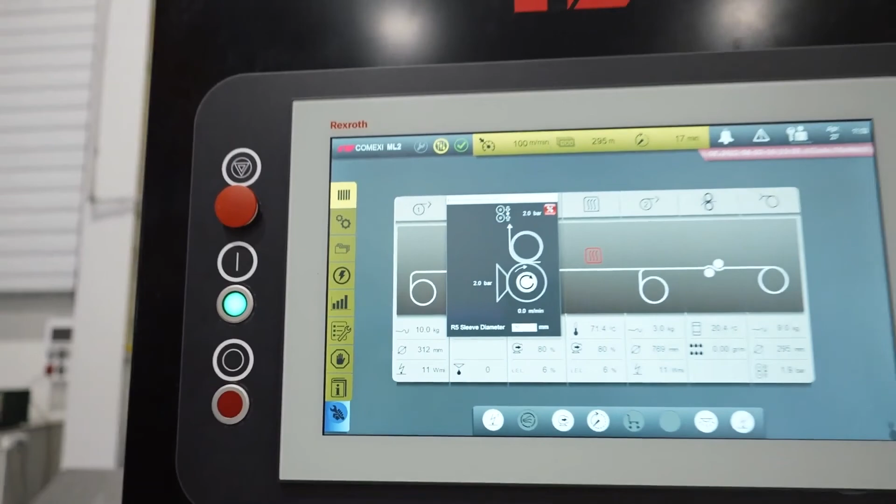Khalid, can we increase the machine speed now? 200 meters a minute, please. Okay, yeah, thanks so much.

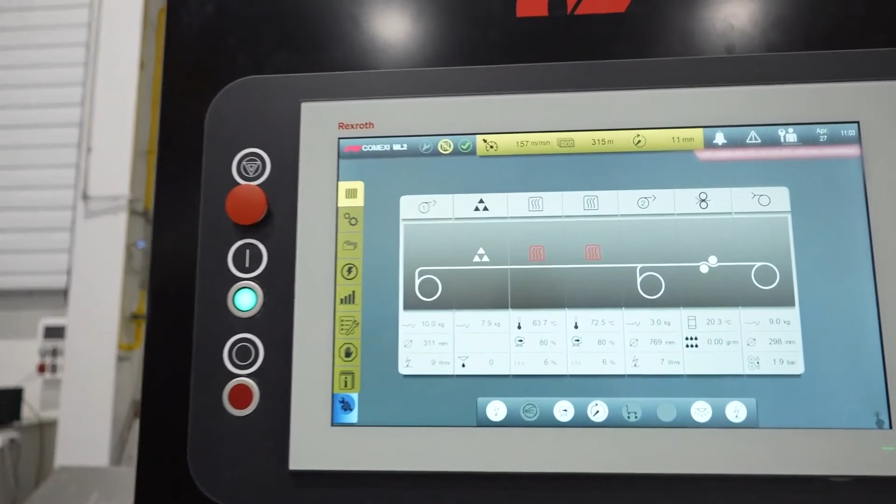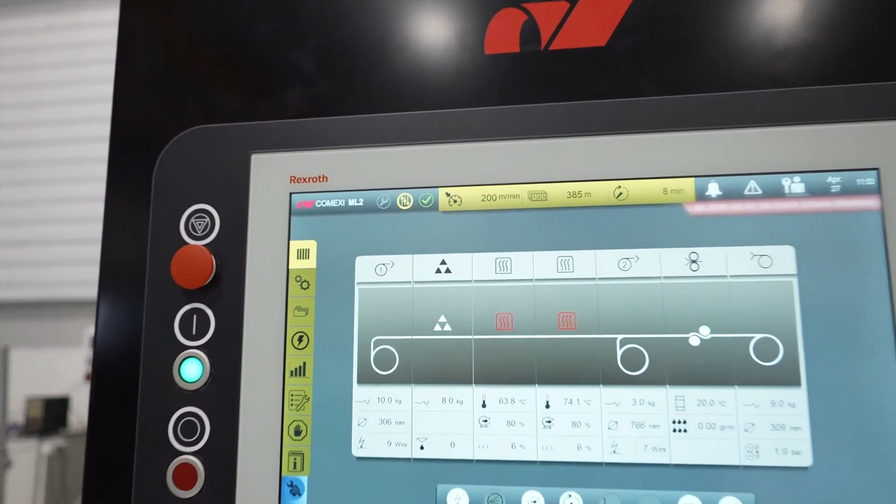Now the machine is accelerating up to 200 meters a minute. There you go, very good. It's running smoothly, and the machine is in a stable regime with all the setting parameters in place.

You can notice how fancy this machine is with all this new design and new technology applied here, and we're having a closer view now of the whole system.

Remember that we are laminating MDOPP with a PE to simulate a monomaterial structure. Now we are moving to the secondary unwinder, where we have placed the secondary reel of LDPE. Same parameters as the first unwinder, up to 1,000 millimeters and 1,000 kgs.

Perfect tension with the dancer roller. Just look, it's not moving at all, so it's controlling perfectly. And also the secondary corona treater.

From Vetaphone, of course. And also we have the nip, which is from Bottcher, as it ensures a high quality result for these very sensitive materials.

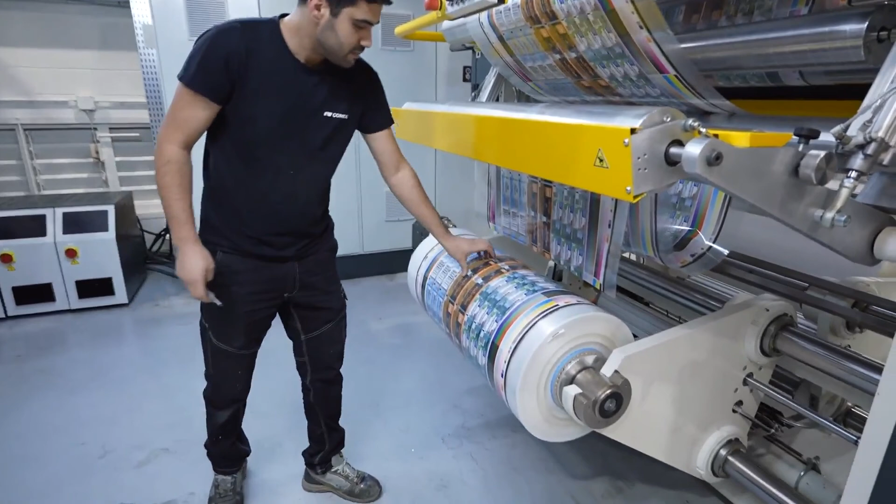Just slice it here. We see there's no curling. Take one sample out. Good results, are you happy with it, Khalid? Great, thank you very much. Thank you, Khalid, for your help.

I hope you liked the demonstration of this lamination of the 2 MDOPP with LDPE with water-based adhesive from BASF. Now it's time to give the word to Alexander Astudillo, who will collect all your doubts, concerns and open questions, and we'll be glad to answer them.